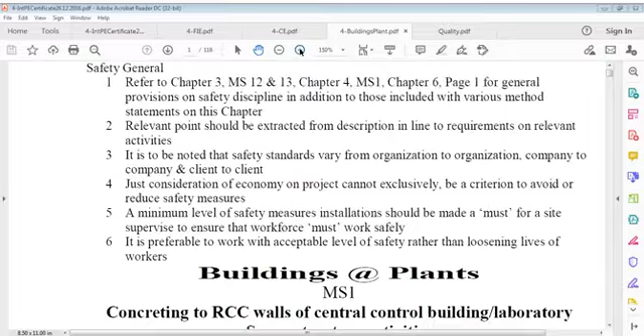If we can say, okay, we stand here, we try to limit our work. We try to confine ourselves into some defined scope of life, or we have to find ourselves what is our scope of life. The scope of life, intellectual can define itself, but those who just want to know scope also through someone else, I can't help them.

Quality is such a world where you will find something indifferent. Achievement of quality is not easy, because achievement of quality means you have to achieve system, you have to achieve individuality, and you have to achieve element quality. And all this can be achieved only when designs is quality one. If designs are not quality one, all stage design I'm talking, all stages design, which are also included in construction,

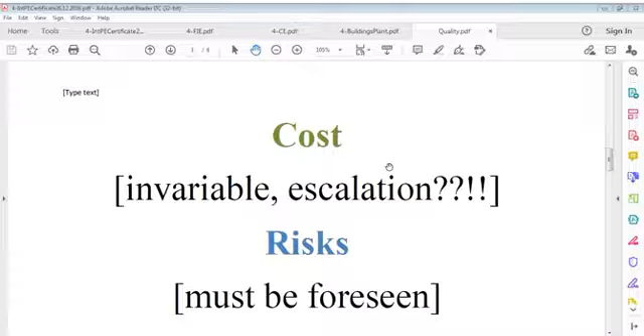all performances, all activities, all expressions in writing or otherwise, all time and cost issues, everything, every act of life relates to quality, cost and time, risks involvement and reliability, all based on safety requirement, serviceability requirement, durability issue, and all analysis and synthesis.

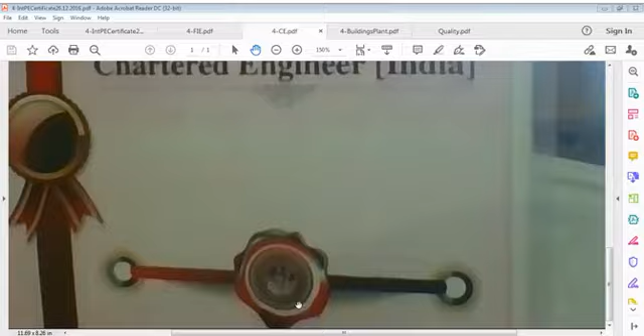Contemplation and application of those contemplations, which I can say real engineering, that engineering must be based on thinking capacity, thinking which is real world of quality, because it generates quality also, rather than just thinking quality can come through that. This is its own quality, its own systems, its own world.

Everybody has a right to do so. I never say you do quality which others think. I never say that. You cannot even depend on what others think I have to do. No, it's not necessary. You have to define your life yourself. Just like when we used to talk to some youth, or even now you talk, you ask what's your ambition. That youth may stick to making money.

I think on an average basis, I want to make money, or I want to get a job which is very famous one, by which job one gets eminence. If that's part of life, that's quality you think, this means you are very much isolated in yourself. You are very much isolated in your own world, because just getting some position or just getting money, these do not amount to quality achievement.

Quality can be defined in many ways. In engineering, which is very much a scientific world based on logical talks, logical issues, logical procedures, logical attainment, one feels something. You know what happens when we join some institution for education purposes.

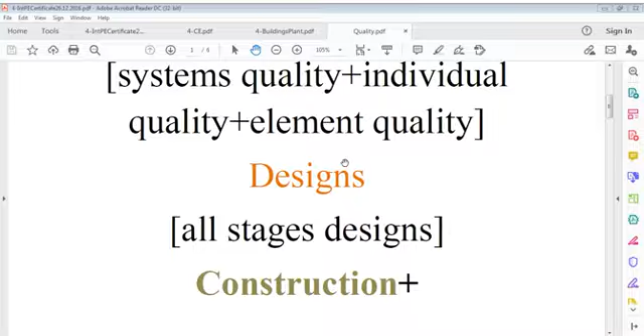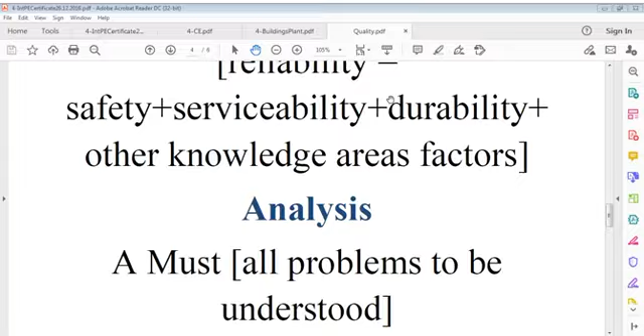If not basic designs, the working designs, or you deal with design coordination, you have to deal with construction, you have to deal with activities, you have to deal with method statements, you have to deal with time, cost, and quality, and you have to deal with risks, you have to solve risks, you have to do reliability, you must achieve those reliability factors like safety, serviceability, and durability, and whatever knowledge areas are available, you have to conduct analysis and conduct synthesis, and you have to think and think and think.

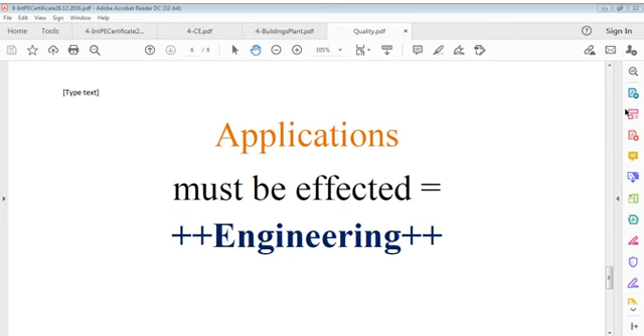Exponentially you have to think. Contemplation you have to create. And then it goes to final application or group of applications, which is termed engineering. So engineering is not simply a subject as we think. A study of engineering is not enough. A study of engineering on the work front is important.

Maybe people disagree with that. Doesn't matter. You can disagree. Everybody has the right to disagree. But the right to disagree on facts is not permissible. If facts say something, you are bound to accept that. Even if you don't accept that, facts would force you to accept that. You have to. So that's what engineering is about.

Engineering means world. Engineering means a different world. It means development. It means evolution of development. There was a time when there was nothing. When the universe was created, who knows what was there? I wasn't available. I don't even know how many years back it started to run. But we see facts that this is available. So we say, yes, it was delivered or it was constructed.

We don't know whether it was delivered as prefabricated planets or these were constructed in situ. We can't say, we don't know, but the system is working. This fact can't be denied. If somebody denies this fact, that person can be called a lunatic. The planetary system is working, the solar system is working, universes are working, whatever system, air envelope, gaseous envelope, sunlight, sun rays, or earth, lithosphere, seas, oceans, skies, all have been successfully working. I think this can be called perfect engineering.

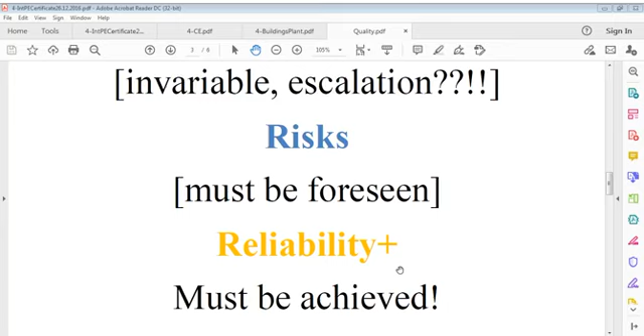That's what's more important, so I cannot say more on that. I will not go much further. I will simply say I used all these talks for very technical statements, and these statements equip every one of us into a defined work, defined activity, that activity without which we cannot do anything. That act or activity helps everybody.

If we respect our work, our thoughts, our actions - everybody has thinking power. Somebody has higher than normal and somebody has below normal. This thinking power makes us, this thinking power builds everybody. If you cannot use thinking power, if you are lacking, that is a different question and answer. But when you have power, ask yourself to what extent did you use that power.

People don't use that power. They just want answers, they don't want to research, they don't want to think. If they think constructively, you will get construction. When you think destructively, you will get destruction. It's your own approach, you can't blame someone else for this.

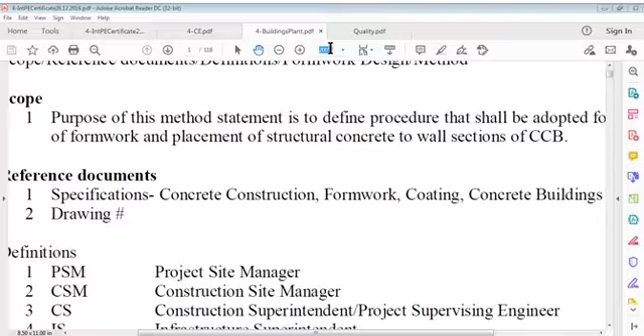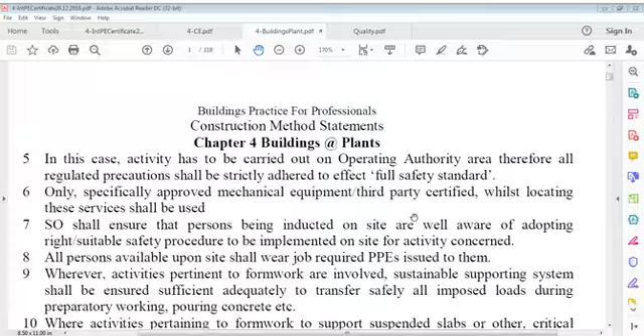Therefore it's very important that we have to realize method statements in engineering, and that's a very important point. I was last time on the chapter of this file, and we had moved a lot on this immensely, and we can say that we should do everything that's required for construction, quality construction. We have to. If we do not do, I think we make a mistake by abusing our strength, our power, our knowledge for sake of nothing.

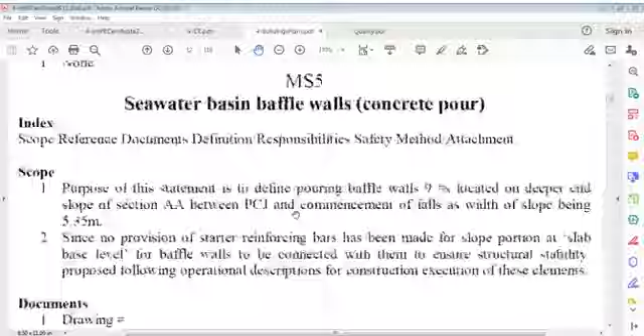We have gone through many statements on this file and shall refer to many more files. Many more basic statements we have gone through, which are of course a very convenient method to understand something. That convenience is also good. Let me see where I am reaching.

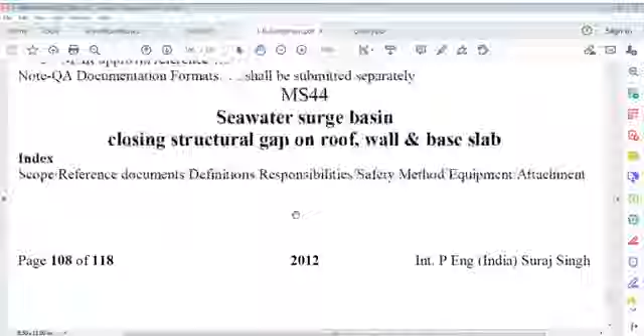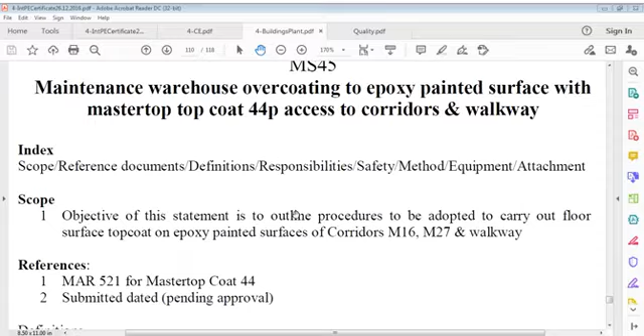And then it was maintenance warehouse, not this one. If we go to the other one, that is seawater surge basin closing structural gap on roof - this we have done. Then we had done maintenance warehouse overcoating to epoxy painted surface with mastertop. Okay, let us see this. Maybe this is a good one. And it's the corridors and walkways. Now references are same.

Objective is to outline procedures that shall be adopted to carry out floor surface top coat on epoxy painted surface of corridors and walkways. So floor surface top coat on epoxy painted surfaces of corridors and walkways. And this is master top material. Leave it now.

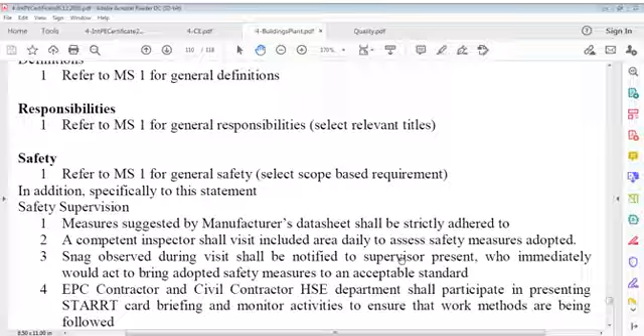Now safety is almost same. Measures suggested by manufacturer's data sheet shall be strictly adhered to, and visit of competent inspector all the time as usual. Snags which should be cleared, and both EPC and the other one HSE etc. So contact the HSE department, participate in presentation of STARRT card, and that is safety task analysis and risk review technique, we call it STARRT - safety task analysis and risk reduction technique.

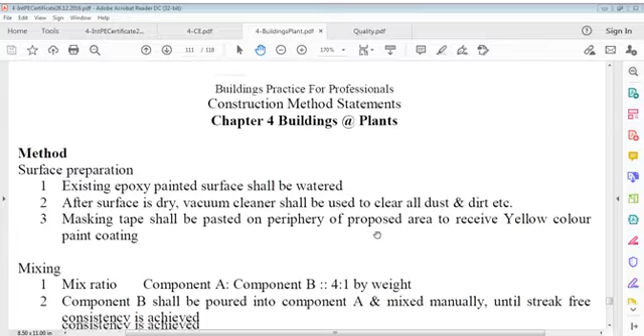We have storage of material. It is stored in shed out of direct sunlight. Now what is method? Surface preparation.

Existing epoxy painted surface shall be watered. After surface is dried, vacuum cleaner to be used to clear all dust and dirt.

Masking tape shall be pasted on periphery of proposed area to receive yellow color paint coat.

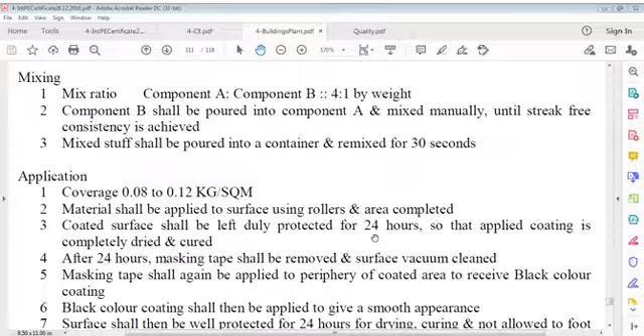Then we can say, okay, let's apply this product. Now let us note, per information of manufacturer of this construction chemical, coverage is 0.08 to 0.12 kilogram per square meter.

Material shall be applied to surface using rollers and area completed. Coated surface shall be left duly protected for 24 hours. Once read.

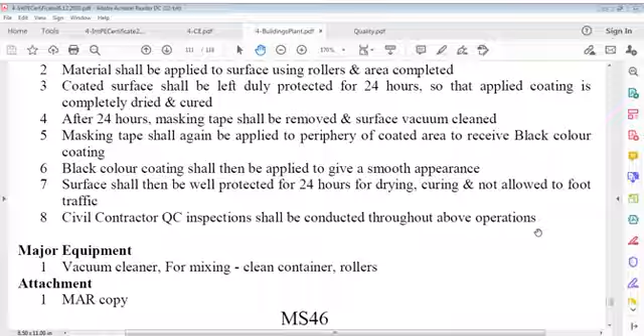So what we need is a vacuum cleaner, clean container, roller, and whatever other documents we have. This coverage is very limited, of course. Material will be applied to the surface using rollers and the area completed.

It's very important to understand the methods. Now another one is the substructure, foundations you can say.

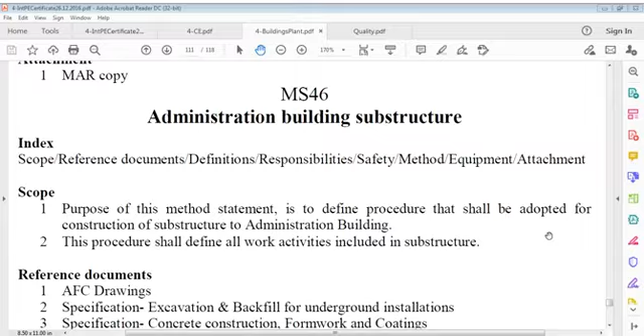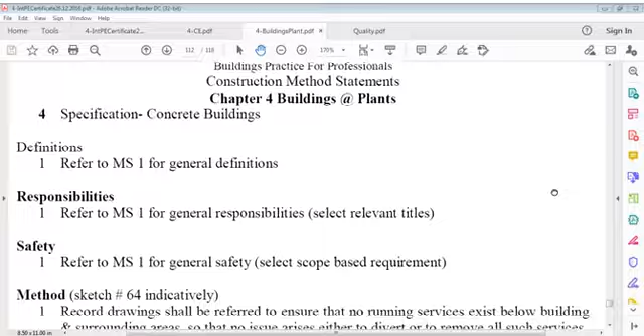The purpose of this statement is to define the procedure we adopted for construction of the substructure of the building. This procedure shall define all work activities included within the substructure, and we have drawings and specifications of excavation and backfill, underground installation, concrete construction, formwork and coatings, and of course specifications for the concrete building. We can say responsibility, reliability, safety.

Now sketch number 64, that is the administration building sketch number. If you want to see it, it's no problem, I'll show you.

What is important in this case? We have to work on that. What's important in this case? That's the important point.

Record drawings are called as-built drawings. We refer to these to ensure that no running services exist below the building and surrounding areas, so that no issue arises, either to divert or to remove all such services not required in that area.

The building shall be set out by a land surveyor in accordance with the IFC drawings, in the real world. What we say is, you have to set out this building through a surveyor, and this can only be done after making sure that no services exist. The administration building shall be set out by the surveyor in accordance with the drawings issued for construction.

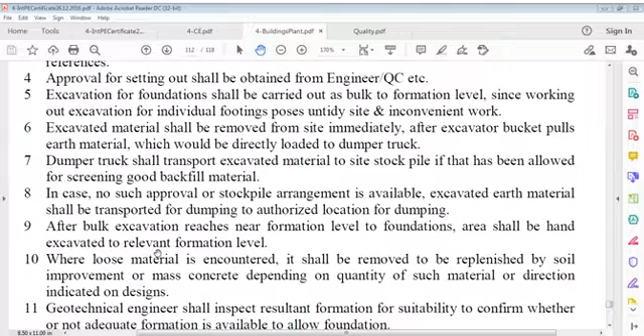Excavated material shall be removed from the site immediately after the excavator bucket pulls the earth material, which should be directly loaded to a dumper truck. The dumper truck transports excavated material to a site stockpile if that has been allowed, for screening good backfill material. In case no such approval or stockpile arrangement is available, the excavated earth material shall be transported by dumper truck for dumping at an authorized location for disposal.

After bulk excavation reaches near the formation level for the foundations, the area shall be hand excavated to the relevant formation level.

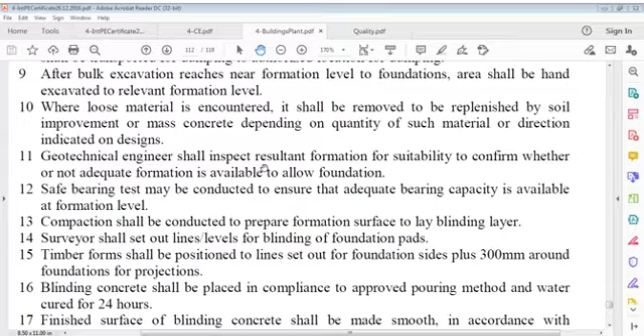Then you can say safe bearing test may be conducted to ensure that adequate bearing capacity is available at formation level. Compaction shall be conducted to prepare formation surfaces to lay blinding layer. Surveyor shall set out lines and levels for blinding of foundation pads. Timber forms shall be positioned to lines set out for foundation side plus 300 around foundation for projections.

And before doing blinding, if there is some treatment to be applied, that shall be applied. Chemical treatment can be applied, or whatever is given in the specification requires to be implemented. Now, blinding concrete shall be placed in compliance to approved pouring method and water cured for 24 hours.

Finished surface of blinding concrete shall be made smooth in accordance with membrane application requirements. Blinding concrete shall be primed with polyprime SP ready for receiving protection membrane application. Protection membrane shall be applied according to manufacturer's data sheet and reference to project specifications. Membrane system shall be inspected and accepted by either vendor or site trained representative prior to allowing other further activities.

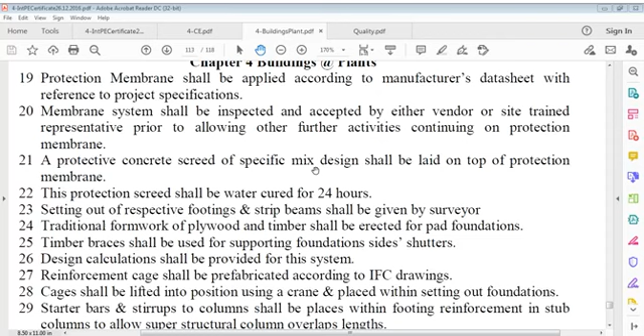Continuing on protection membrane. A protective concrete screed of specific mix design shall be laid on top of protection membrane if required for design, and curing for 24 hours shall be done. The setting out of footings and strip beams shall be effected.

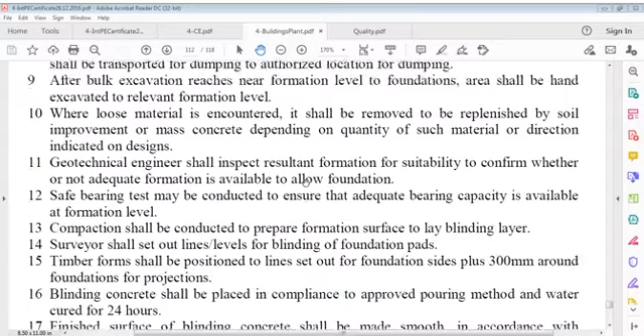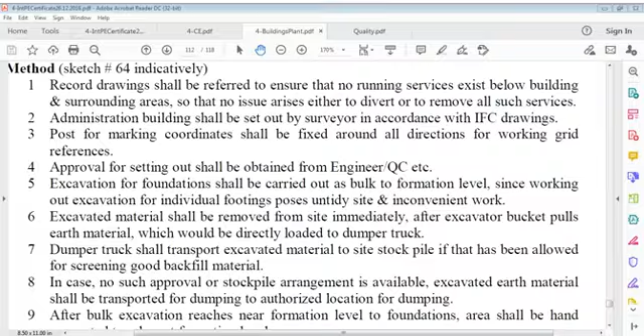Okay, hold on here. We'll see, because I want everybody to at least understand this. 64 I think is administration building. I'll show you if I can. Drawing number 64. That is in my directory. 64, admin building it is, so let us show you.

It's a very simple building. Of course, it's the administration building, an important one for everybody. We are talking about a simple building and also very simple engineering. This building has 2 floors or more. You can see offices are shown, records room, conference area, then stores and offices and stair and lifts all are shown.

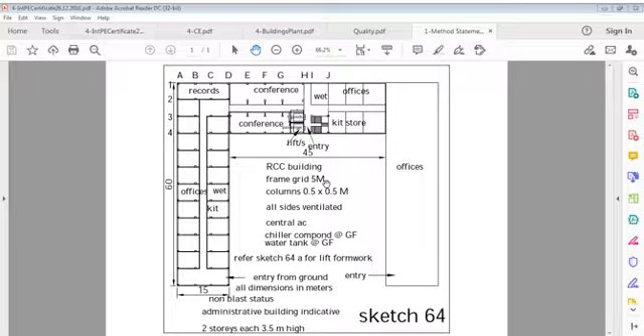RCC building frame grid is shown, A, B, C, D, E, F, G, H, I, J, and on one side 1, 2, 3, 4 like this. And columns etc. All sides ventilated, central AC, chiller compound, water tank. Then entry from ground is there, all dimensions are there. That side is a mirror reflection of this side.

I think it's terrific. Being simple, it's a good one. And we can say what we do.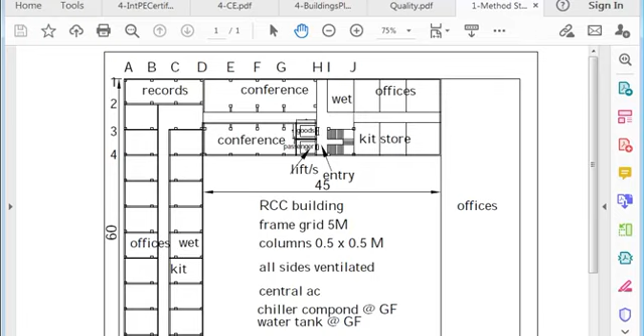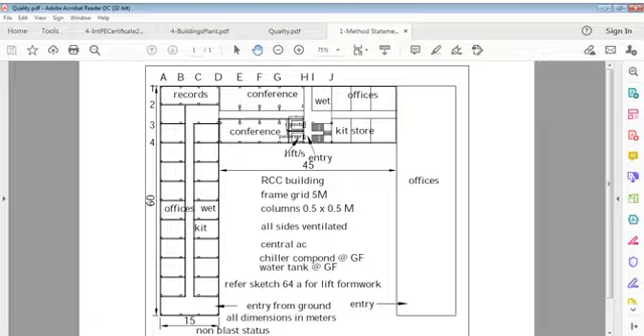Can I do like that? I can't, I think. So let me take another copy of this and see if I can open this. How does it look? Can it come like this? No, it won't. You have seen this building; you can read as much as you can. Meanwhile I'll be back. I'm sorry. Let me go for 10 minutes, come back.

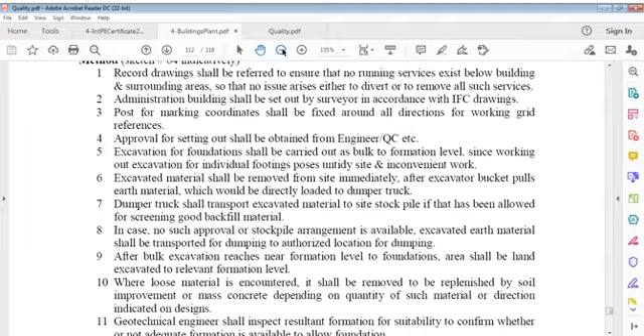So let us go again and do it. All right. So we continue with this, no problem here. It's important to continue like this. You must have seen this now. Watch for something different here. So we are talking of this.

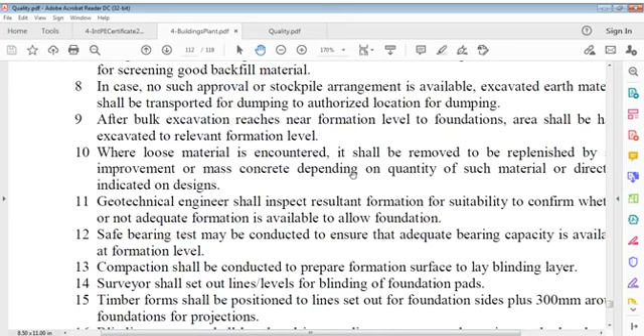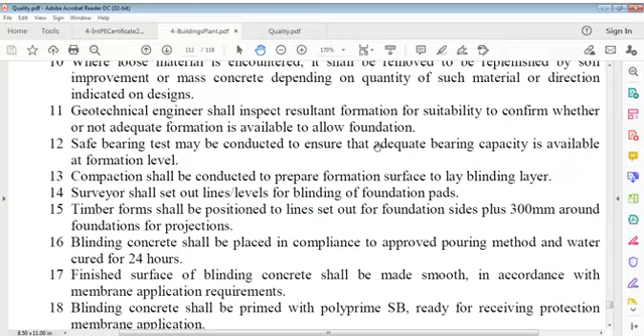After bulk excavation reaches near formation level, foundation areas shall be excavated to relevant formation level, and where loose material is encountered it shall be removed and replenished by soil improvement or mass concrete depending on quantity of such materials or direction indicated on designs. Geotechnical engineer shall inspect resultant formation to confirm whether adequate formation is available to allow foundation. Safe bearing test may be conducted to ensure that adequate bearing capacity is available at formation level.

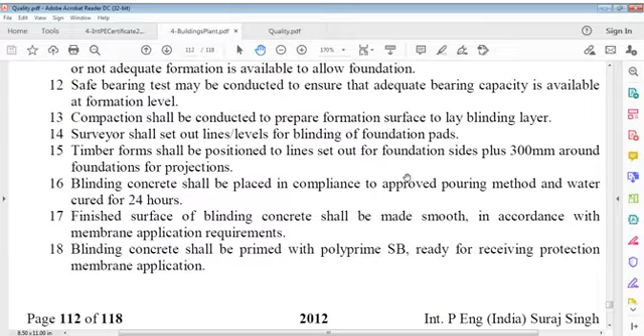Compaction shall be conducted to prepare formation surface to lay blinding layer. Surveyor shall set lines and levels for blinding of foundation pads. Timber form shall be positioned to lines set out for foundation sides plus 300 mm around foundations for projections according to design. Blinding concrete shall be placed in compliance to approved method statement and cured by water or whatever method for 24 hours at least.

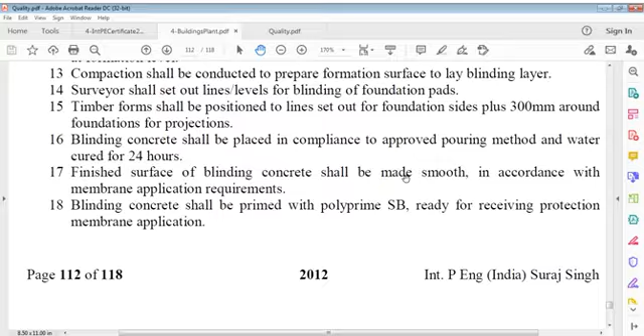Finished surface of blinding concrete shall be made smooth in accordance with membrane application requirements. Blinding concrete shall be primed with polyprime SB, or whatever material you have for waterproofing, ready for receiving protection membrane. Protection membrane shall be applied according to manufacturer's data sheet or instructions with reference to project specifications.

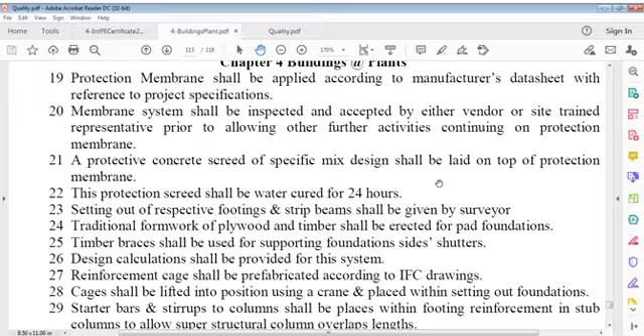Of course, membrane system shall be inspected and accepted by either vendor or site trained representative prior to allowing further activities continuing on protection. I repeat, membrane system shall be inspected and accepted by site trained representative prior to allowing other further activities continuing on protection membrane.

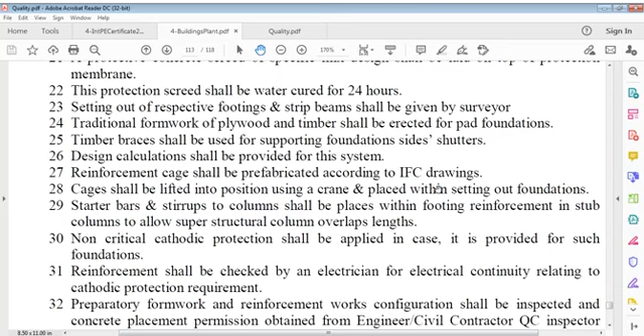A protective concrete screed of specific mix design shall be laid on top of the protective membrane. This protection screed shall be watered for curing for 24 hours.

Setting out of respective footings and strip beams shall be given by the surveyor, or you can say setting out shall be done or laid out by the surveyor. Setting out for footings and strip beams both.

Traditional formwork of plywood and timber shall be erected for pad foundation. It must be prepared in advance, because if you just prepare at that time, it will take more time. So the sides of foundations composed of plywood and timber scantlings should already be prepared and erected on markings. Timber braces shall be used for supporting foundation sides, etc.

And that's what we say. And we can say that it shall be done. It should be done accordingly. It shall be done like that. So we can say

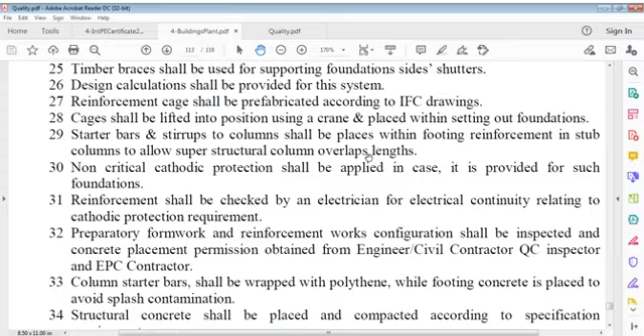And if required, non-critical cathodic protection shall be applied in case it is designed for such foundations, particularly when this structure lies in some processing plant area, where central control of protection of steel from corrosion is affected.

If there is cathodic protection, reinforcement shall be checked by an electrician for electrical continuity relating to cathodic protection requirements, which we already discussed at length. Whether the cathodic protection is critical or non-critical, there must be continuity of steel bars, otherwise this protection may not perform to the intended requirement.

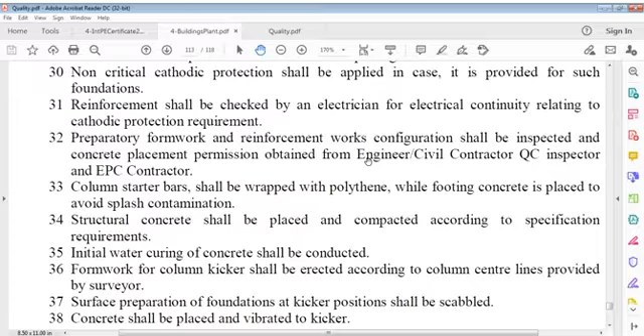Preparatory formwork, meaning shutters, and reinforcement works configuration shall be inspected and concrete placement permission obtained from the engineer or civil contractor, inspector, quality control, whoever is responsible for that. A joint approval is a must.

Column starter bars shall be wrapped with polythene while footing concrete is placed to avoid splash contamination. No concrete, mortar or slurry splash should go to these bars. They must be protected not only during concreting but also after, until these are shuttered for concreting. And even after shuttering but before concreting, the top portion along with the shutter must be protected so that oxidation is avoided.

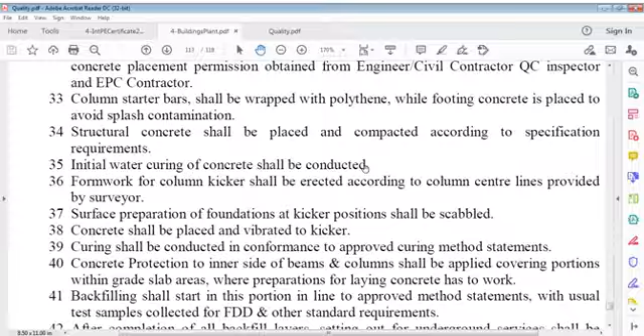Structural concrete shall be placed and compacted according to specification requirements. Normally we do it. Then initial water curing of concrete shall be conducted. Formwork for the column kicker shall be erected according to column center lines provided by the surveyor. It is optional. You may do it without that also, but it's procedural; if it is required, it's required.

Surface preparation of foundations at the kicker position shall be scabbled, meaning you have to keep it ready for a construction joint. If you provide a kicker, it is scabbled so that all laitance is removed, and there's good bonding between the kicker top and the new column concrete, or you can say the construction joint is well formed. Concrete shall be placed and vibrated to the kicker.

Curing shall be conducted in conformance to approved curing method statements. Whatever methods we adopt, by direct water application, by curing compound, whatever method you have to apply. Concrete protection to inner sides of beams and columns shall be applied, covering portions within grade slab area where preparations for laying concrete has to work.

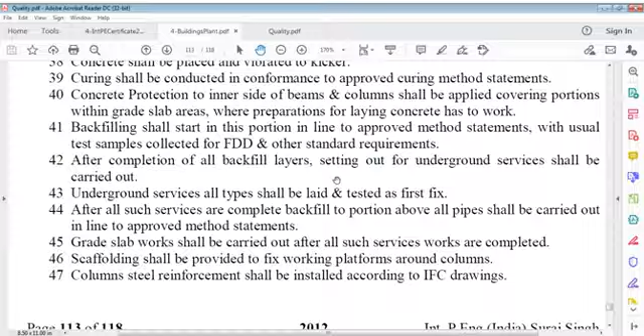So concrete shall be placed and vibrated to kicker. Curing shall be conducted in conformance to approved curing method statements. Before that, surface preparation of foundations, kicker position shall be scabbled. Concrete shall be placed and vibrated to kicker. Curing shall be conducted in conformance to approved curing method statements.

Concrete protection to inner side of beams and columns shall be applied, covering portions within grade slab areas where preparations for laying concrete has to work. Backfilling shall start in this portion in line to approved method statements with usual test samples collected for FDD and other standard requirements. After completion of all backfill layers, setting out for underground services shall be carried out.

Underground services all types shall be laid and tested as first fix. After all such services are completed, backfill to portion above all pipes shall be carried out in line to approved method statements. Grade slab works shall be carried out after all such services works are completed.

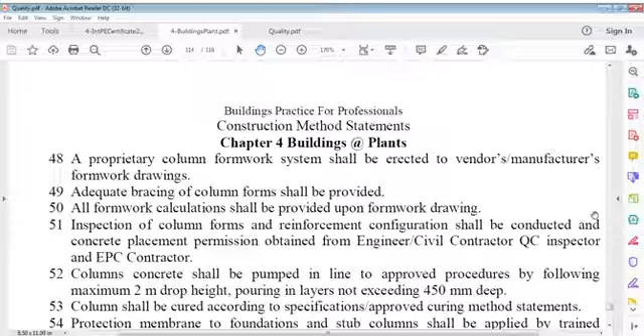Scaffolding shall be provided to fix working platforms around columns. Column steel reinforcement shall be installed according to IFC drawings. A proprietary column formwork system shall be erected. What it says, let us see. A proprietary column formwork system shall be erected to vendors or manufacturers' formwork drawings or your own.

It's not necessary that we have to take formwork drawings from manufacturer's vendor. No need. These are columns, we can design our own system. If it's normal column, say 4 meters height, we can use normal 18 mm ply and normal battens or jacks and prepare our own system without any problem. It's very ordinary. But as part of procedure, proprietary column formwork can also be taken.

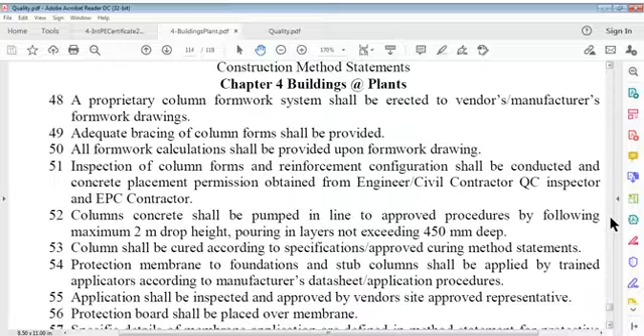No bar. Adequate bracing of column forms shall be provided. All formwork calculations shall be provided upon formwork drawing. That's very important part of engineering. You have to provide calculations, means resisting force by formwork all sides and imposed force from concrete when concrete is filled and laid, and there will be certain gimps, certain procedure in that which is not given in books.

Means it takes time to cast column layers, means 450 layers, and there are 4 meters high, 10 layers, possibly 9 layers, and each 3 layers may take 1 hour, so there will be 3 hours. If you do a group of columns, it takes 2-3 hours for one column to pour, and in 2-3 hours maybe 1/3, 1/4 or half column starts setting, and pressure is reduced on all sides. So that point is required to be considered while doing formwork economically. You cannot take full height with 100% pressure on sides. So that point we'll discuss elsewhere.

That method is of course very easy if you analyze it yourself, with an understanding of practicality and site work. We can ourselves calculate the pressure on this, and that pressure is resisted by plates, considering the thickness of plywood and battens, and then of course if you allow 16 mm or 12 mm bolts within sleeves or shikanjas or clamps, whatever you can say, and then jacking and propping, all that, there must be some resisting force generated to equal or be greater than the horizontal force of the concrete which is filled, and it can be done that way.

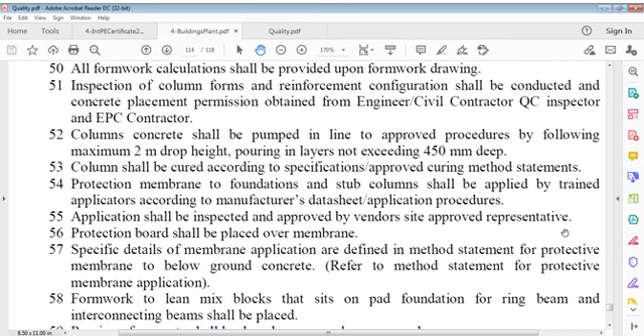If it comes in the first 1 to 2 layers, you'll always find a problem, because first of all, it's not seen from a height of 4 meters. It's difficult to see, but also vibration is not that good. You must have an adequate vibrator with a long pipe, so that there's no problem in vibration of those first 2 or 3 layers. Column shall be cured according to specifications and approved curing method statements.

Curing immediately starts in hot weather around setting itself. You can cover the top portion by polythene sheet or gunny bags later on, but whatever it is, that volume of column concrete must be kept under required temperature so that heat loss is not immediate. And then you may remove shutters after 24 to 48 hours, and if you can't remove them due to no availability of formwork to replace, let it be there, just keep it wet all the time.

And when you remove shutters, you have to be very careful to apply curing on that immediately. Inspect that surface. Column shall be cured according to specifications and approved method statements. Protection membrane to foundations and stub columns shall be applied by trained applicators according to the manufacturer's data sheet. Alright, so this is stub column concrete. Application shall be inspected and approved by vendors.

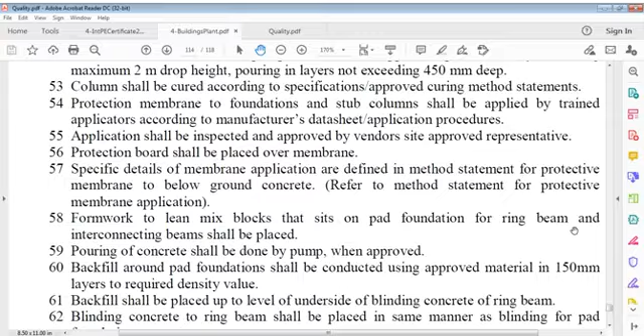Specific details of membrane applications must be given in the method statement for protective membrane. Below ground concrete I'm talking, not above ground. So you can go through how to apply protective membrane there, which is a very important point to be included with an understanding. Then formwork to lean mix blocks that sit on pad foundation.

Ring beam and interconnecting beams shall be placed. Pouring of concrete shall be done by pump when approved. Backfill around pad foundations shall be conducted using approved material in 150 mm compacted layers to required density value FDD. Backfill shall be placed up to the level of the underside of blinding concrete of the ring beam. Blinding concrete to ring beam shall be placed in the same manner as blinding for pad foundation.

Membrane and membrane protection screed shall be applied and approved as mentioned previously. Reinforcement shall be placed according to approved drawings. Formwork to ring beam including box outs and inserts as applicable shall be erected using traditional plywood and timber forms.

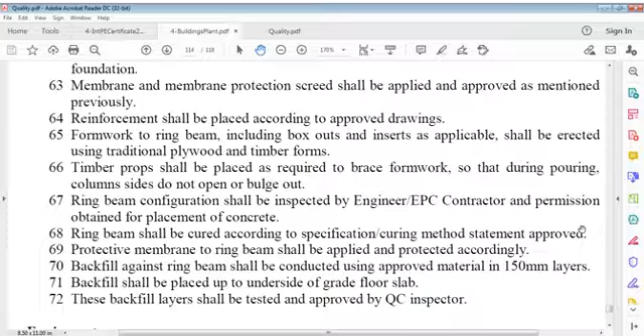Timber props shall be placed as required to brace formwork so that during pouring the sides do not open or bulge out. Ring beam configuration shall be inspected by the engineer and permission obtained for placement of concrete. Ring beam shall be cured according to specification requirements and the approved curing method statement. Protective membrane to ring beam shall be applied and protected accordingly.

Backfill against ring beams shall be conducted using approved material in layers. Backfill shall be placed up to the underside of the grade floor slab. This backfill layer shall be tested and approved by the inspector. What do we need? Excavator, dump truck, compactors, concrete pump, concrete truck, mixers, hand tools, etc.

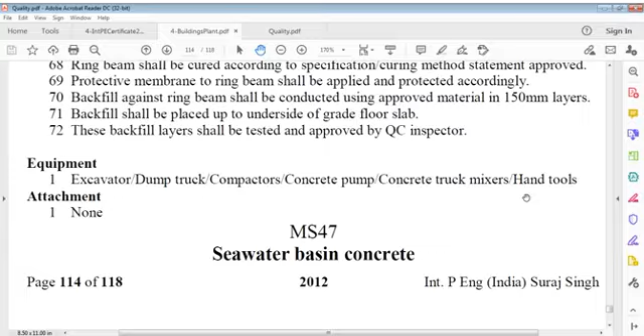And seawater basin concrete. Before going to the seawater basin, let us revise this long statement, what actually we could do in this administration building, which in this case is a very important one.

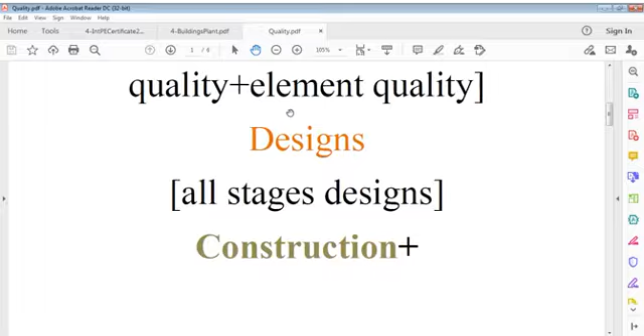In this we studied total building concrete. As discussed before, when you start some building, we have to know where this building is to be situated. Within that area, below ground, what is the status of services? That must be known. And if we know this, fine, the status is important. Maybe there are services that are running, live services, or some dead services. We have to know that before we start excavation of that area. It's common, but how to know whether there is something or nothing?

Either we break everything manually and see, that's also dangerous. But if we have some information from official bodies, we can collect this information from them. They must have some records, if they are serious bodies. If they are not serious, there can be no question on them. Point is, being serious is very important. If you are not serious, you can't do anything in life. And engineering construction means seriousness. Seriousness defines engineering.

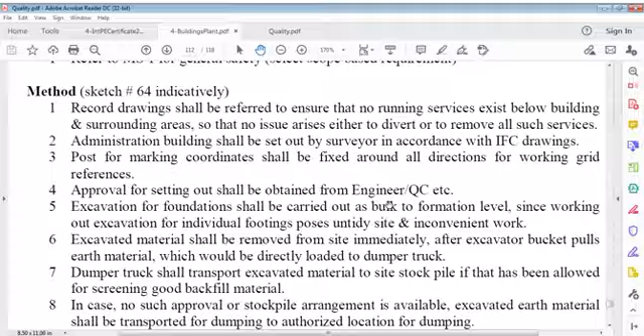Approval for such setting out must be obtained before doing anything else. Excavation for foundations will be carried out as bulk to formation levels, provided we know nothing exists according to information from record drawings, as-built drawings. We cannot do excavation if we are doubtful. We have to find services ourselves. If there is no government support, we have to find services ourselves. Let's make sure we are working professionally. The point is really interesting one.

Now excavation for foundation shall be carried out. Mass excavation is better than excavation for each column, because you can take the machine directly down, for example the excavator or shovel, and the truck can also enter the foundation area in that case. Excavation for foundation shall be carried out as bulk to formation level, since excavating individual footings poses an untidy site and inconvenient work. So make a ramp, go down if you have space, excavated material is placed onto a truck or dumper and taken out. Easy way.

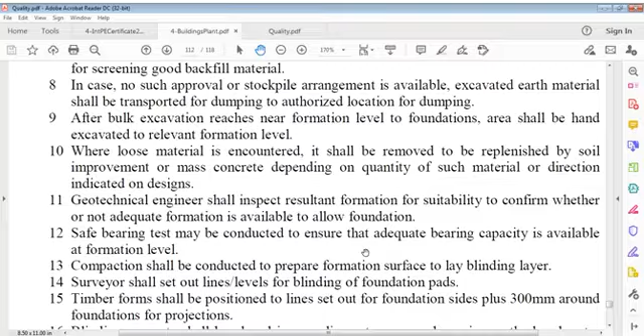Where loose material is encountered, we have to remove it and replenish it by soil improvement or mass concrete, because loose material cannot be allowed below foundation. At formation level, loose material even if compacted may not work, so it's better to remove it all and use concrete, normal blinding, which works better than something else.

Or if it's bad soil, you may want to remove a portion, say 40 or 50 centimeter thickness, or remove all bad material and replace it with new material. That's the site.

If we have compacted, we should not compact that actually. A bearing test may be conducted to ensure that adequate bearing capacity is available at formation level. That's a very important point, and if it's available, no problem.

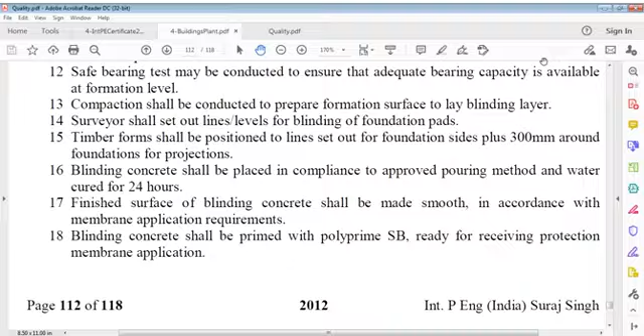Timber forms shall be positioned to lines and levels. The finished surface of blinding concrete shall be made smooth in accordance with membrane application requirements. Blinding concrete shall be primed with polyprime or whatever material, ready for receiving the protection membrane application.

This membrane shall be applied according to the manufacturer's data sheet or procedures with reference to project specifications. Specifications cannot be violated, and the manufacturer's data sheet must also be complied with. Both must be followed; there is no instruction that goes against specifications. However, the membrane system shall be inspected and accepted by a representative prior to allowing further activities.

Continuing on protection membrane: it shall be applied according to the manufacturer's data sheet and instructions according to specification. The membrane system shall be inspected and accepted by a representative before allowing further activities to continue. Protection to the protection membrane shall also be done.

The protective concrete screed of a specific mix design shall be laid on top of the protection membrane in horizontal position, while in vertical position it shall be protected by flex board. The protection screed shall be water cured for 24 hours.

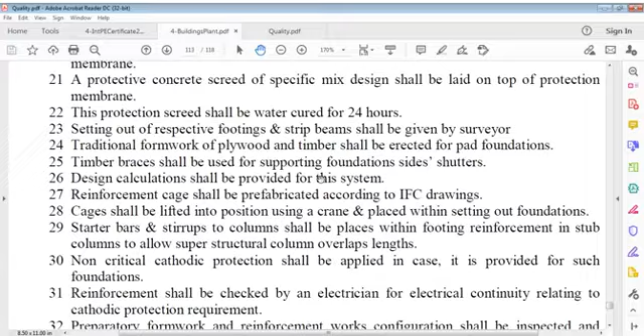The reinforcement, already made as a cage - we call it a reinforcement cage - is placed in the foundations where the spacers are marked, including cover.

Then, non-critical cathodic protection - hold on. The cage shall be lifted into position using a crane and placed within the setting out foundations. Starter bars and stirrups to columns shall be placed within the footings and within the periphery of the column and stub column to allow superstructural column overlap lengths.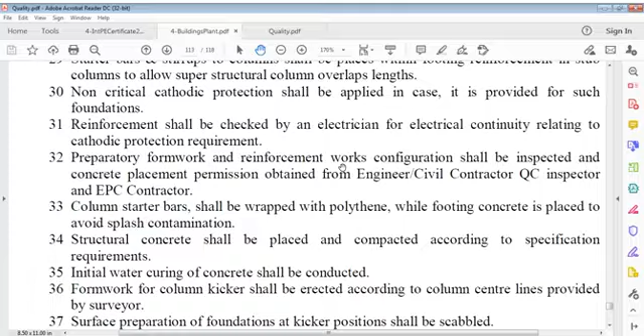Non-critical cathodic protection shall be applied in case it is provided for such foundations. Reinforcement shall be checked by an electrician for continuity, confirming continuity relating to the cathodic protection requirement, and the preparatory formwork and reinforcement work configuration shall be inspected and approved.

Column starter bars shall be wrapped with polythene while the footing cover concrete is placed, to avoid splash contamination. Structural concrete shall be placed and compacted according to requirement.

So, the preparatory formwork or reinforcement work configuration shall be inspected. Column starter bars shall be wrapped in polythene while footing concrete is placed, to avoid splash contamination. Structural concrete shall be placed and compacted according to specifications and requirements. Initial water curing of concrete shall be conducted.

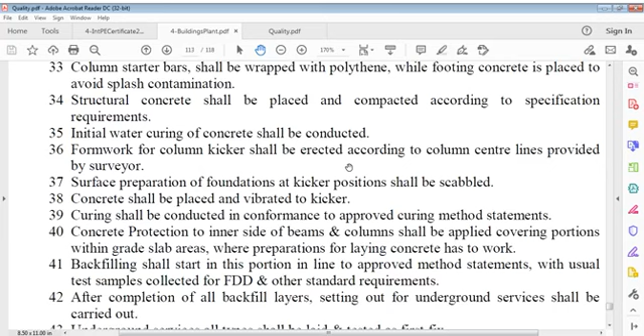Formwork for the column kicker shall be erected according to the column center line provided by the surveyor, for the stub column. Surface preparation of the foundation at the kicker positions shall be scabbled. Concrete shall be placed and vibrated at the kicker. Curing shall be conducted in conformance with approved curing method statements.

Concrete protection to the inner side of beams and columns shall be applied covering portions within grade slab areas, where preparations for laying concrete have to be finalized.

Now let's go a little further. Let me see, just a minute please. Let me just put my battery on so that it charges more. And go for opening of

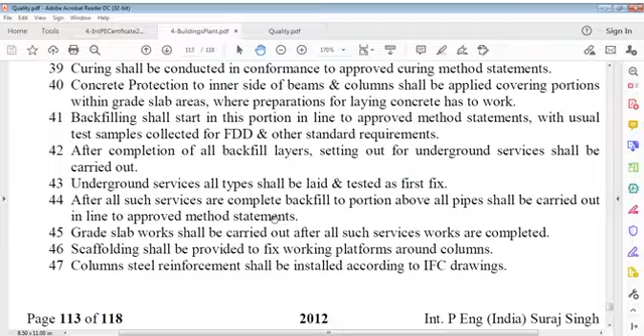So column steel reinforcement shall be installed according to IFC drawings, and scaffolding shall be provided to fix working platforms around columns for placing column steel reinforcement, installing it according to design. Then a proprietary column formwork system shall be erected to vendor's or your own design. Adequate bracing of column forms shall be provided.

Let me show you if you can see something in this case from here. For example, let me see if I can show you a column form. Yes, it is a column form. This is also a column form, I think. Let us see if we can show this way. Just showing this form. You can see this form here. 0.6 into... no, the formwork is not that one.

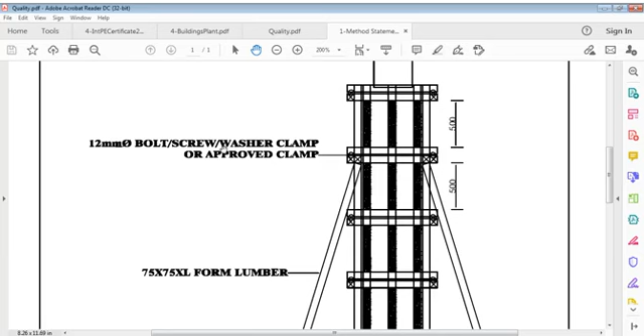For formwork I'm showing this 12 dia bolt. This is a bolt here. 12 dia bolt, screw, washer, clamp, or approved clamp, and then this top support. Here's the bottom support. This is just fixing. You can see in section here. In elevation you will find these fixing points here. 75 by 75 lumber, steel clamp. You can see these forms at 500 spacing here, and these are forms like this.

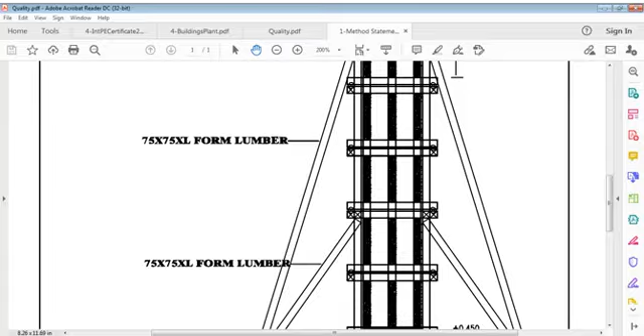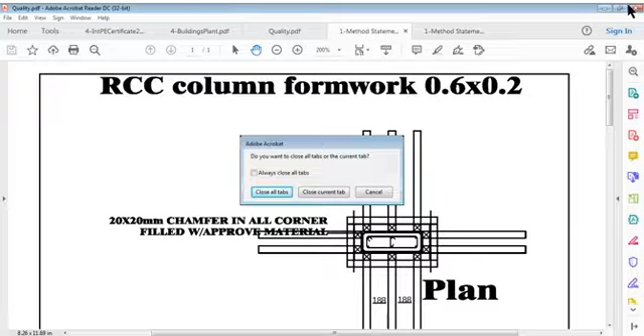And also I can show you one more if possible. Let's see. Yes, there's another one here, 0.6 by 0.2 column. You can see here. You can see this plan here. Same type. You can see that way here. So this is not correct. I can show you also others.

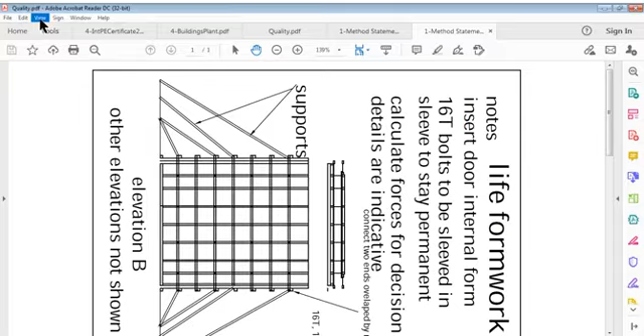Sketch 55, column formwork. Lift form I show you again. Lift form, which is also an important one. Lift form, this is, by mistake it's written like this, but it's lift, don't take it otherwise.

So you can see it's a very complicated one if you do it manually. It has 4 sides, 1 door wide here, and these elevations show the thickness and details of this. This is a lift pit below floor level, below ground floor, and this is the platform here. It's shown for the purpose. We have bolts here, you can see how it works. Quality formwork. This is a formwork. So we can say we are safe in this case.

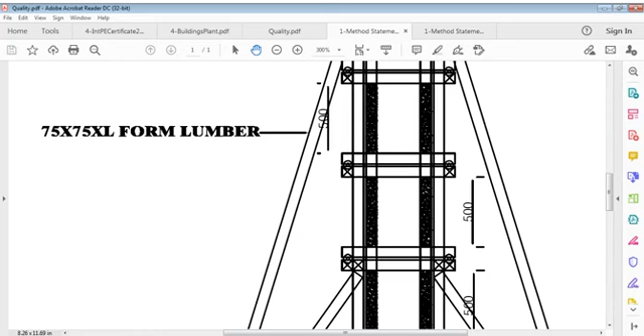So we can say a proprietary column formwork system shall be erected, or we have to design our own system, that is shown to you. Adequate bracing of column forms shall be provided, which are shown to you. All formwork calculations shall be provided upon formwork drawing, or we can calculate ourselves, no problem.

It's easy. It's a 50 by 50 column, for example, 0.5 by 0.5, and it comes, you can say, 4 meters height. So 0.25 into 4 meters height, 0.25 is 1/4 of 1 cubic meter. It is 1 cubic meter concrete you are putting in this column of 4 meters, 0.5 by 0.5 into 4 meters, 1 cubic meter concrete means 2.4 tons. 2.4 tons of concrete we are filling in this space of 4 sides, one side is 0.5, so there are 2 meters.

This load is taken by 2 meters into 4 meters, 8 square meters. 8 square meters is taking so much load. So how much load is coming on one side, you can find 1/4 of that. Then you can just say what's the total pressure of that. That's WH squared over 2. This total pressure is taken by this. So with that you can find the resultant pressure at 1/3 height.

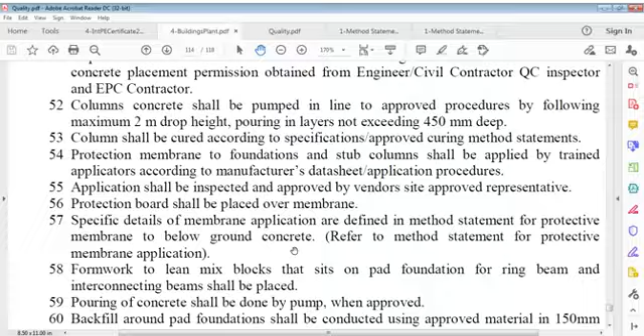And of course, the slab was time consuming. You need stepped access to that. You need preparation of ladders, and steps according to the drawing of the bottom profile of the stairs. You prepare the drawing first, how to fix this cup lock system, and accordingly fix it.

It's not artistic but engineering work. You have to do temporary engineering for preparatory works, and that's very important to fit in everywhere, with different varying heights.

We have to work on that and do something about that. It's important. Slab is ready. All services must be ready. Reinforcement must be ready. Reinforcement should be transported to the slab, and the work of reinforcement is done. It's placed, a very time-consuming one, but don't allow it to be rusted. You have to protect it every evening till morning.

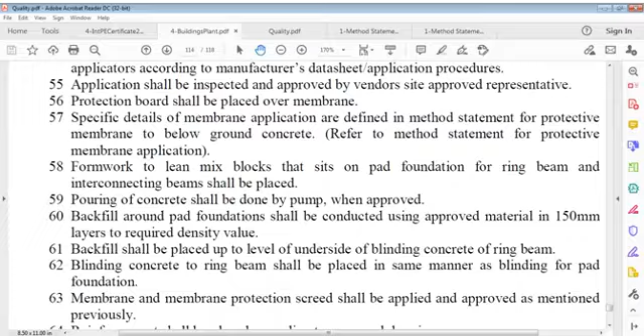We'll take this talk later on also. It's very important because it's not only a one-story talk. It's repeated upward; we'll take care of the lift also in this talk. We'll take up the stair also in this talk. I just partly completed that because of time. Already we are going to complete 3 hours of this talk, approximately 4 minutes more.

So what I studied means a building cannot be taken for granted. It may be a hollow block slab, it could be something else, it could be a precast slab, it could be cast in situ, it could be whatever. You have to differentiate among them. You have to think which is the best one. If you take that into consideration, it's a professional understanding of how to do that, how to strike that also.

That's important. There are so many considerations everywhere. You have to understand that it's not simply a one-line statement or a one-page statement. We have to take into consideration every plus and minus point of what we do, what specifications to speak of, what to think of. Everything is important in itself, and we are not to worry about that, but to think of that, and that thinking is very important. And once we do that, I think we are successful.

We can say we are not timid, we are professional. We have to move professionally in every respect. Well, I'm a different type of person as an engineer, because I put myself in some other position. We have to see the merits of all proposals or points. Engineering is that we have to think every way. You have to think what I would do in this case of cast in situ, or precast slabs, a hollow core slab, or hollow blocks, or something else, how would I have done it?

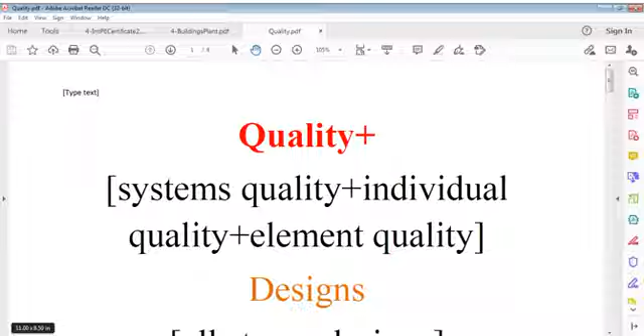Really, we have to ensure that the concrete we're getting from RMC is qualitative. Otherwise, there's no meaning of it. We don't want layman mix, we want quality mix. They should provide us quality service because we are paying them. It's not free service. Batching plant should be calibrated well. Batching should be professional. It's not simply a machine mixing plant. It's a concrete plant. It must be professionally worked upon.

If you don't take these points into consideration, we don't do justice to ourselves. It's a very important point. Justice to ourselves, justice to everybody, and justice to all. That's required. We have to be very careful about this point.

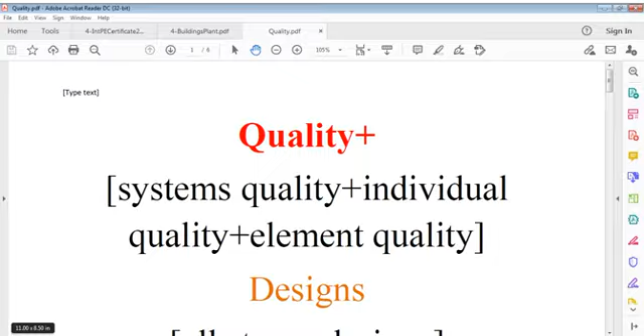It's not lengthy, but I would say today's talk is a little limited one, explanatory. I'll try to show you as much as I can show. Engineering is engineering. You have to understand this point very well, and if you understand this point very well,